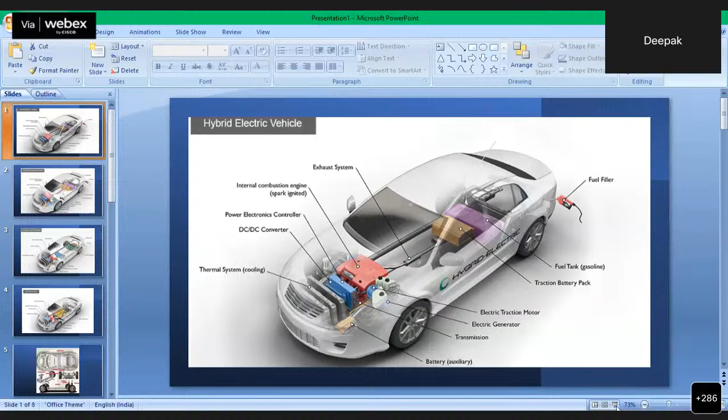Okay, so this is actually — you can maximize that. Thank you. I didn't put too many slides. This is for our understanding of what we are doing right now with hybrid, plug-in hybrid, and electric vehicles.

So the first one is the hybrid vehicle. This is how a hybrid vehicle will be in passenger cars. We still have fuel, we still have internal combustion, because a hybrid vehicle is a mixture of internal combustion and an electric motor.

So that's an external electric motor. We have here a fuel tank, we have traction batteries, we have electric traction motor, electric generator, we have transmission. We have everything a conventional passenger vehicle has. On top of that, we have an electric motor here.

Even the engine is I4, so we'll get the power like a V6, and it's on par with a V6 car, and also it's fuel efficient. Maybe the starting traction is not that much like a conventional passenger vehicle, but you'll get 6 seconds to 60 speed or something like that. You can expect that in 8 seconds, but anyway, it's a fuel efficient vehicle. So that's how a hybrid electric vehicle will be.

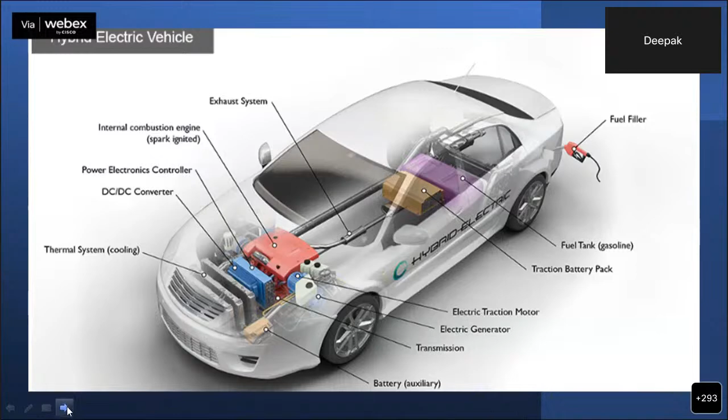So you have plug-in hybrid, and the next one would be like electric vehicle. Here you have everything looks like the same as a hybrid, but you have a charging port which is actually charging your external batteries.

So I mean, you have two batteries here in a hybrid. You have a 12 volts, which you have under your hood, actually like a conventional passenger car - the same thing with the 12 volts. And there will be an extra bulky battery which is actually giving power to your electric motor, which goes to the electric generator, and it gives boost to the electric motor, and then to the transmission.

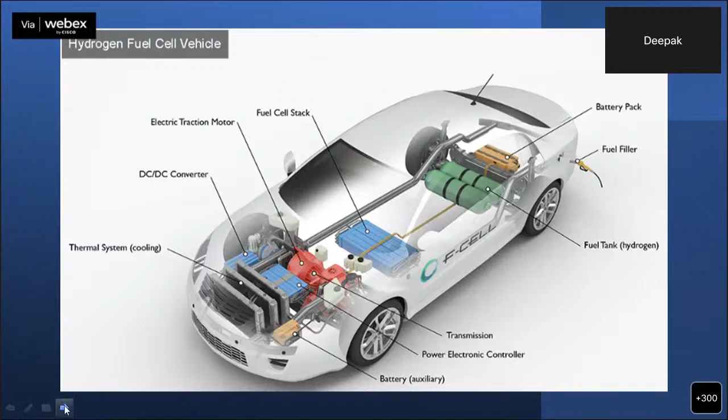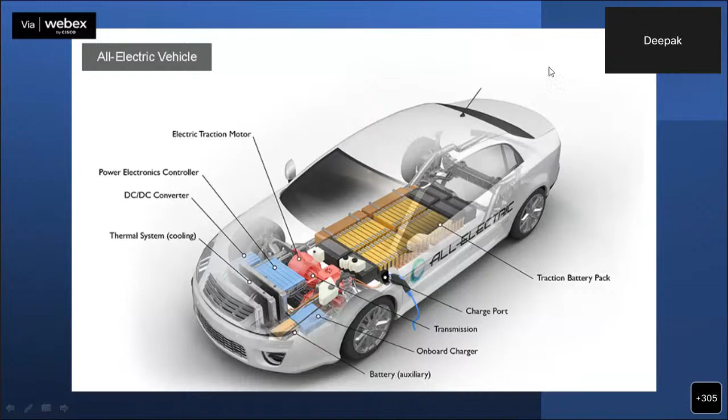What they do is single motor car and dual motor. Dual motor is like four-wheel drive, and single motor is rear-wheel drive. They tried putting it back and forth and saw the push-pull situation - you know about push and pull, front wheel drive and rear wheel drive. So they put it in the push situation, tried it, and it worked well. For slippery conditions and traction, they want to make it dual motors.

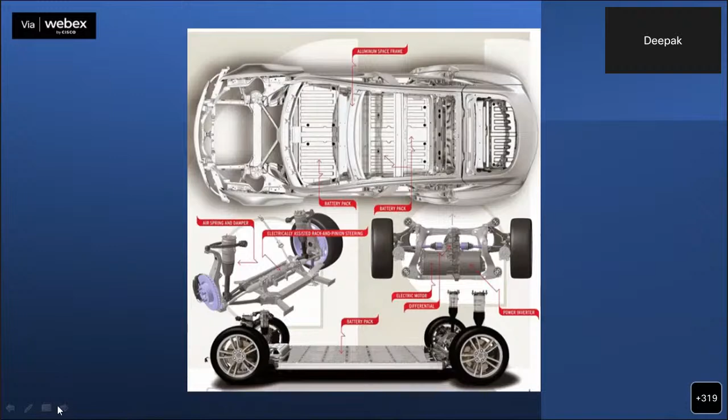I just want to bring up a little more about what is happening in electric vehicles. There is a concept called regen. Regen is like ongoing battery charging for EVs.

Let me take you to the actual situation - you're driving a bike or an automobile, and you give it accelerator. What happens? It goes, and when you release the acceleration, the bike goes on for certain limits - if you're at 60 miles speed, it goes 1 or 2 more miles, and then gradually slows down. Even in cars, it gradually slows down and stops in a certain place.

But in an electrical vehicle, you push the accelerator and it goes to a certain speed, say 60 miles, and there's a motor moving in the forward direction - the wheels are moving forward, the car is moving. Then when you release the acceleration, there's a technology called regen. Regen means the motor goes backwards. The motor goes backwards, but the wheels are still moving in the front direction, and it doesn't allow you to move for a longer time, because on the other side, when the motor is revolving the other way, it is actually charging the batteries.

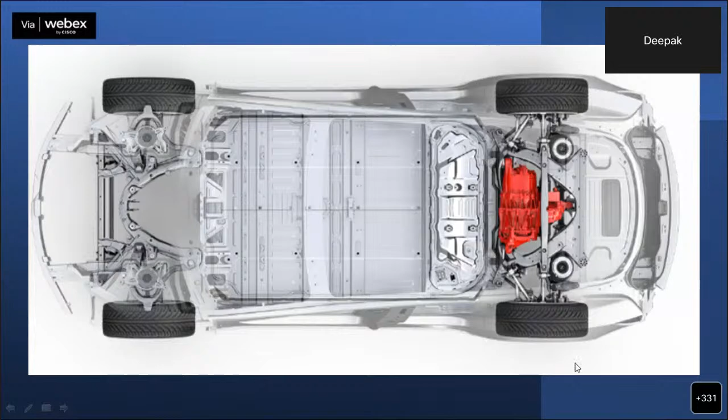EVs are now getting introduced to off-road highway trucks, semi trucks, and also construction equipment. There are certain companies working on mining trucks. Did you ever hear about mining trucks? They're off-road vehicles, and there are plenty of companies getting into EVs.

Electrification is the word the industry uses for off-road and construction vehicles. I worked with one of the big giants, Caterpillar, for a couple of years. When we started the project, there were a few guys who started the electrification effort.

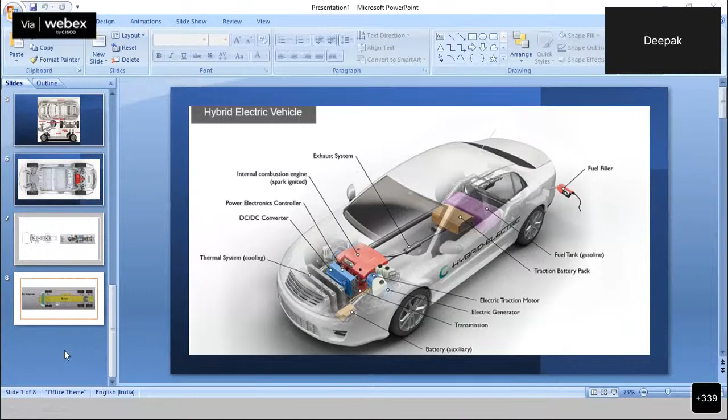The tire of the truck is like 7 or 8 feet high. Even if you jump, you cannot touch the top of the tire. That's how big it is. Even those trucks are getting electrified right now, using the same technology.

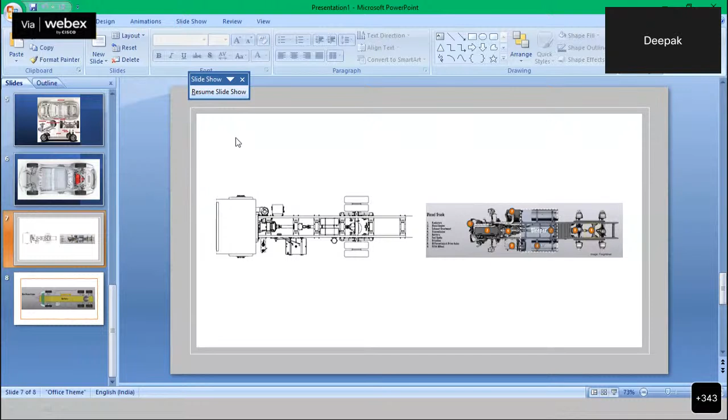That's off-road vehicles, but this slide shows on-highway trucks, which are for transportation. I'll definitely explain what's happening here.

There are some numbers on the right side, the orange numbers - don't worry about those. Starting from the left: there's the radiator, then the engine, then either side we have the batteries. In the middle, either side of the batteries, is the transmission, and there's a sleeper box invisible on top of the chassis - that's the back of the cab. You can see a prop shaft going from the transmission to the end of the rear axles. This is the topology the trucking industry uses right now.

On the left side you can see a kind of wired model, which was made in a 3D modeling software. This is actually the trucking industry right now.

What happened was, a guy introduced a semi truck in 2017, and the whole industry thought, man, this conventional engine approach isn't going anywhere. So we need to get into electrification for these trucks and make it possible for an electric truck to go 400 miles on a full charge. We have Freightliner, PACCAR, Western Star, International, Mack, Volvo - every trucking company realized they had to get into electrification.

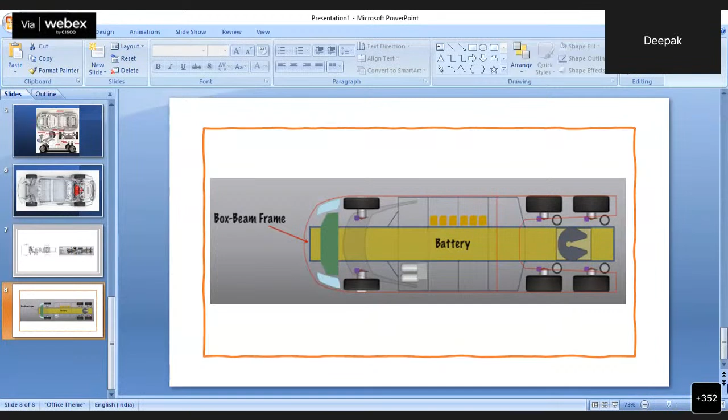Can you go to the previous slide and maximize? Okay, yeah, maximize. So on the right side of the picture, if you can see, there are fuel tanks coming up, right? I just minimized it, made it so small. So there are fuel tanks on either side of the chassis.

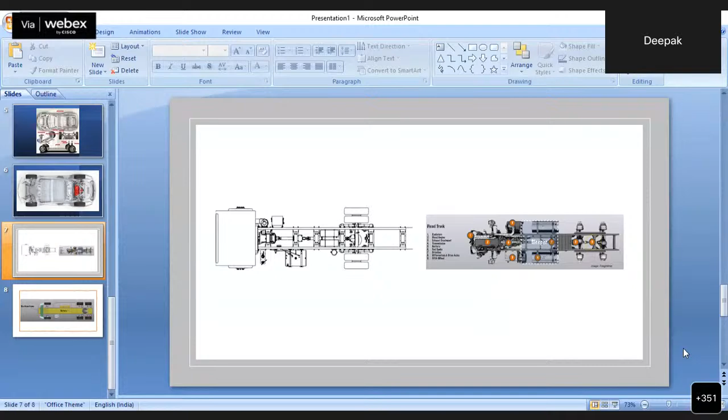Nowadays, in some companies like Freightliner and Peterbilt, they are making a huge bulk of batteries, replacing those fuel tanks. The fuel tanks used to be 600 gallons on either side, and now they're keeping huge battery packs, like 4 packs, 8 packs, which gives 410 miles on a full charge. That's how it's going right now with passenger cars, trucks, and also construction vehicles.

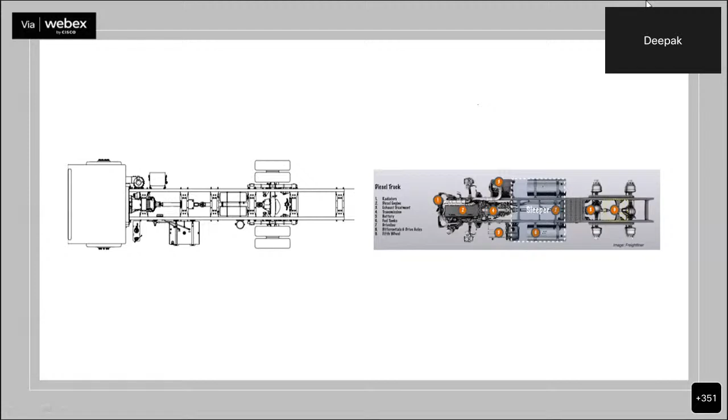I tried my level best to connect the dots, and this is what's right now going on in the industry. Being the program manager for design and development for electric vehicles, this is what I can show you and share the knowledge. Let me know if you have any questions. I'll try my level best to answer, or if I don't get the answer, I'll definitely get back to you guys and send you an email on this.

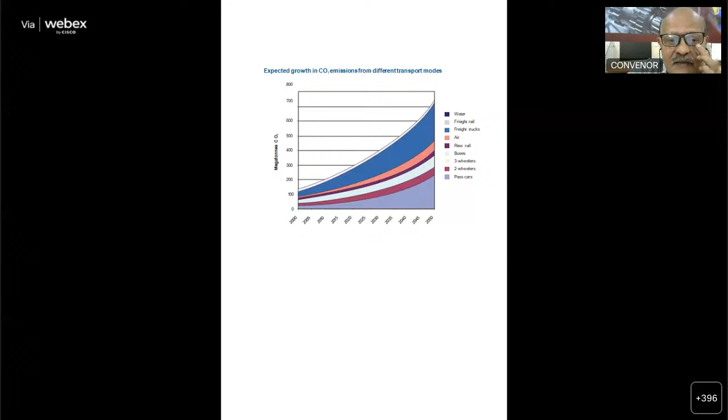In the present scenario of population growth, people are not going for public transport, and non-motor vehicles are being used much less. People are mostly using three wheelers, two wheelers, and similar vehicles. This is the trend, and there will definitely be carbon dioxide emissions crossing the specified norms, affecting the greenhouse norms of the entire world.

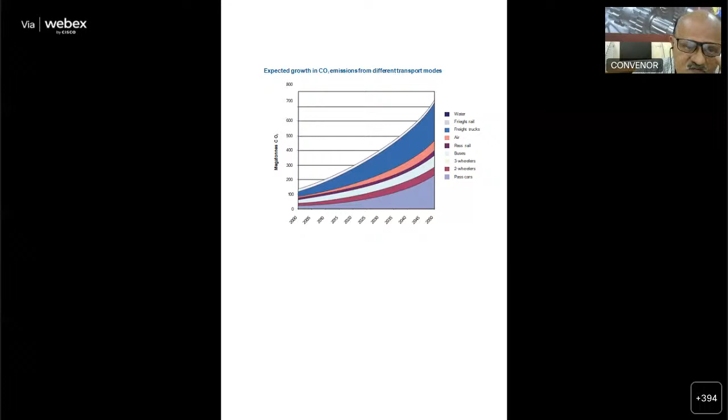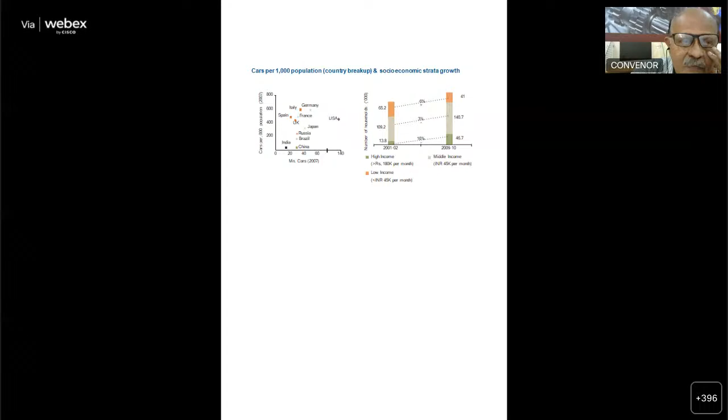The socio-economic growth is affected. If you see country-wise data on the usage of cars per thousand population, it keeps increasing. Earlier it was restricted to high income groups, but now even middle and low income groups are preferring light vehicles, two wheelers, and motor cars. This is causing a case of concern for the present system of vehicles and IC engines, as shown by this trend.

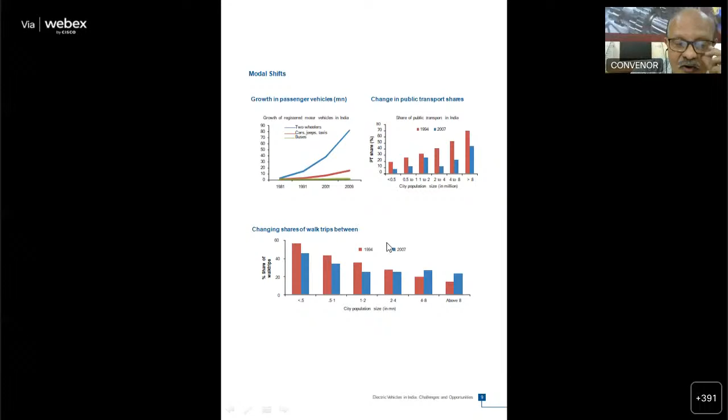With population growth, there is a continuous increase, and cars and two-wheelers have become a necessity. This is the two-wheeler, this is the personal car. Two-wheelers and personal cars are on the rise due to increasing population over the years.

So what is the solution? The solution, evidently, as we all know, is to go for low carbon transport. Electrical vehicles are definitely an answer. The electricity that electrical vehicles consume can be derived from different sources or a combination of renewable sources, becoming an alternative for sustainable personal transportation when coming to low carbon transport.

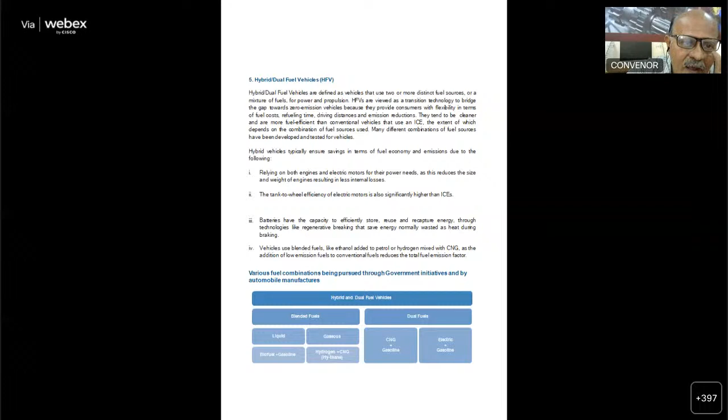So here are various fuel combinations which can be used for hybridization. One is biofuels in dual form with CNG, and liquid or gaseous fuels can also be used as alternatives in hybrid vehicles besides electrical power. These combinations can be classified accordingly, and this is one of the scopes for using and developing hybrid or dual fuel vehicles.

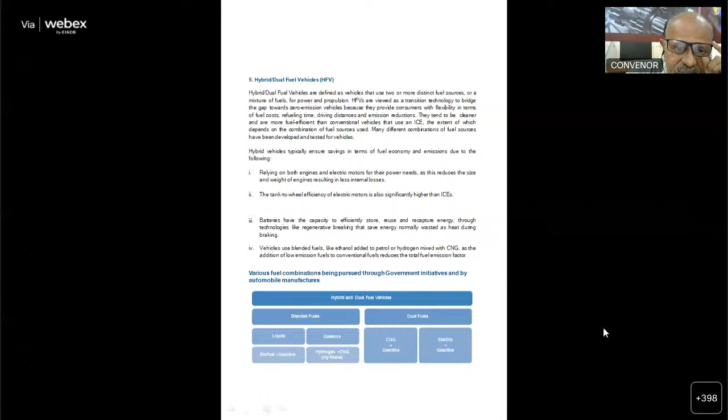Now here is another area: advanced internal combustion engines, where people are thinking to develop IC engines with reduced energy loss and improved, reduced tailpipe emissions by meeting certain environmental standards, specifically emission standards. These emission standards are now being specified by various government regulations for different types of vehicles, and all automobile manufacturers have been asked to ensure these regulations are followed when producing their automotives using internal combustion engines, keeping all these conditions - energy losses, tailpipe emissions, mileage - restrained to ensure emission limits for different vehicle categories.

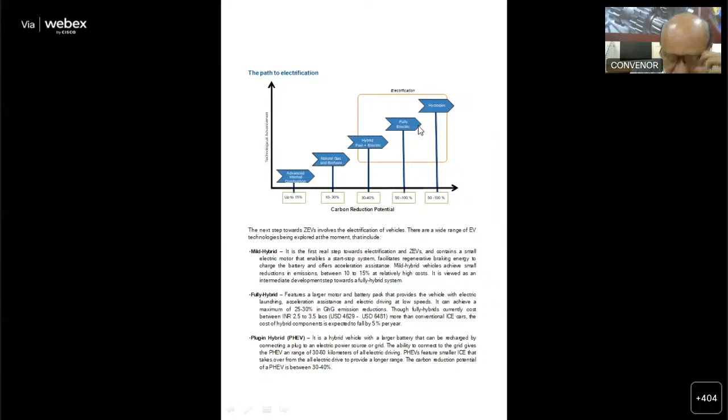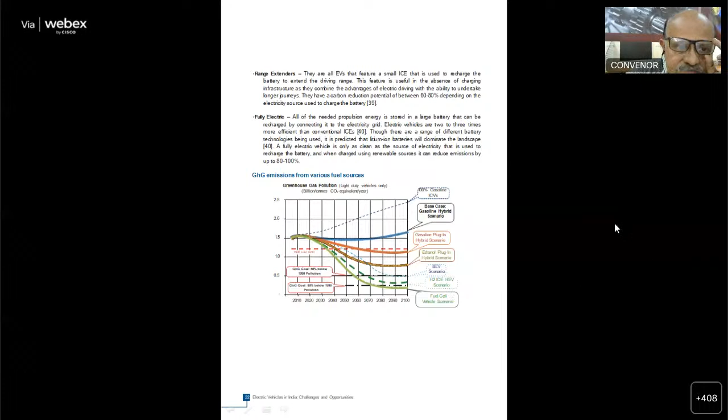Now, for all these things, what are the value chains? The biggest is the raw material. Today, the biggest raw material facing an issue specifically is lithium ion. Lithium ion is a rare earth material, and it is one of the most demanding materials, which over the period of time will get plagued, and the price fluctuations can impact the battery manufacturers. So this is one of the bottlenecks that everybody has to think of.

We should have traditional component suppliers. Whatever traditional component suppliers exist, they should be tying up with EV industries or hybrid producing industries to produce EV parts, so that the issues of spare supply will be reduced.

Then battery manufacturers and suppliers should be there. In the biggest EV industry, battery manufacturers and suppliers have a major role. Besides that, indigenously or for self-reliance, there needs to be a lot of R&D done for improving the battery for electrical vehicles. It is one of the major components for an electrical vehicle, and it is highly costly, the costliest in the electrical vehicle structure besides other things.

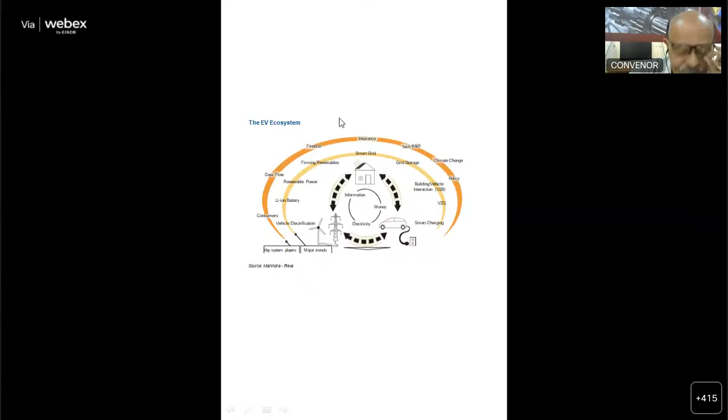The question is, India has taken a lot of policies for promoting electric vehicles. So I will share with you the various government agencies which take up EV mobility in India, their role and comparison, so that for any development, whether R&D or otherwise, these nodal agencies can always be approached for solutions within the country, and anybody can discuss with these agencies for a stronger EV base in our country.